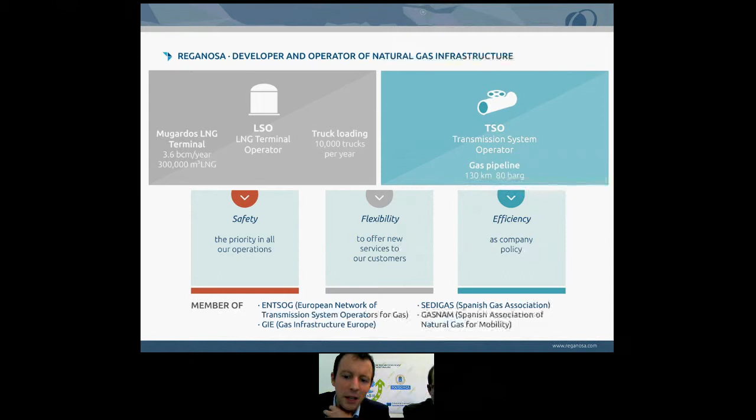Okay, very short overview on our company. Reganosa has a specificity to be both an LSO, an LNG terminal system operator, and also a TSO, a transmission system operator.

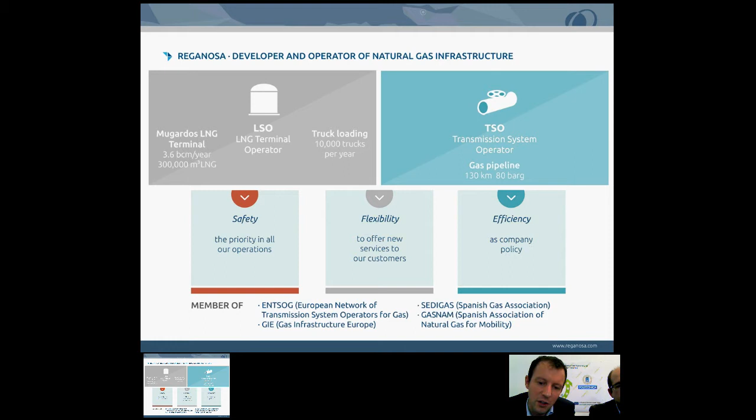The need for LNG is basically coming from the growing distance between the supply point, the production point, and where the demand is located. This distance is growing because of three simultaneous factors.

The first one is the decline in production in Europe, especially in the North Sea. North Sea gas resources were shared by UK, Netherlands and Norway, and the level of these resources is declining every year.

The second impact is the increase in demand in Asia, except maybe Japan, because Japan, after a spike in LNG consumption, is now coming back to normal. This peak of demand was due to the Fukushima disaster, and Japan is restarting nuclear plants one after the other, so consumption is mainly driven by China and South Korea in this area.

As a third point, new discoveries coming from shale gas, especially in the US, and also in Australia. Middle East is not a newcomer in the market, because especially Qatar, when we think about Middle East, we are talking about Qatar obviously. Qatar has been on track for about 10 years now.

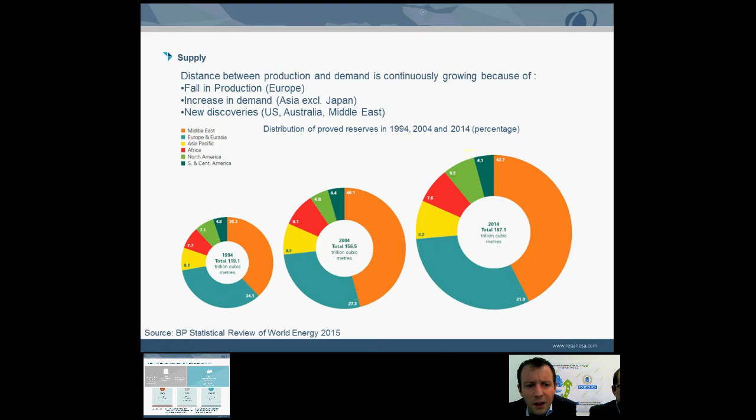So the supply chain can be presented that way: first the extraction, the production, the liquefaction facility. To have an idea, we consider that roughly 40% of all the gas traded worldwide is traded under the LNG form, as against pipeline.

So in the case of the supply chain for LNG, we come to the liquefaction train, after that we enter into the shipping, the transportation of the LNG. Once liquefied, we finish the journey at the receiving terminal, for example Reganosa, here illustrated. After that we proceed to the regasification and send the gas into the natural gas transmission system.

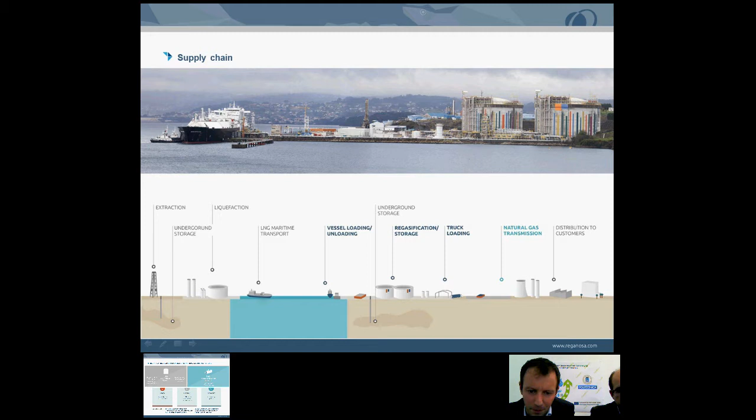Let's start with the liquefaction facilities. I will go shortly through this presentation because it is not the topic of today to know exactly how it is working, but it is also always interesting to understand the complexity of the process and why it is so expensive to liquefy the natural gas.

The idea is to use a typical Joule-Thomson depressurization that will lead to a cool down of the natural gas. First there is a propane loop which is compressed and depressed so that the temperature is decreasing. If we consider a compressed C3, it is exchanged with the natural gas so that there is a first cooling down of the feed gas, and so on with different stages of pressure.

In the middle, there is a very important loop, which is a mixed refrigerant. The process I present to you today is the most employed worldwide to ensure the cool down of the natural gas. This mixed refrigerant is a compound of light ends, especially ethane and ethylene. This ethane is cooled down by the propane, and on a cascade, this mixed refrigerant is used to cool down the feed gas.

Once the mixed refrigerant is at a low temperature, there is a flash, so that the heavy ends with less capacity of cool down go to the mid-level of this thermal exchanger, while the light ends are routed to the top of the exchanger, so that when the feed is climbing along this final exchanger, the temperature is decreasing.

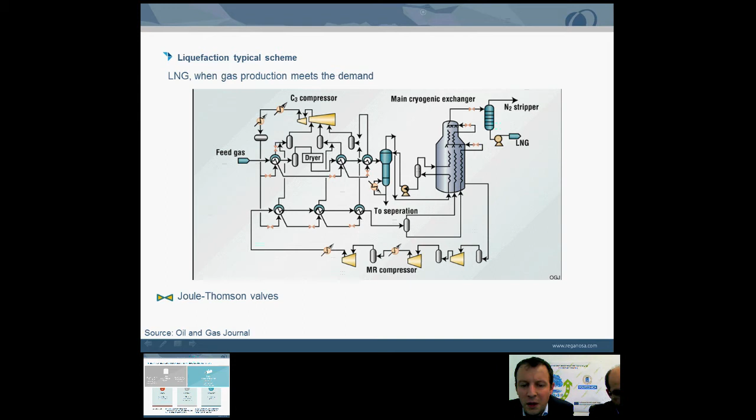A rapid overview about the distribution of the liquefaction facility around the world. As you can see, complementing the reserves I showed you before, liquefaction facilities are spread worldwide, which is quite different from crude oil, so that there is no cartel of producers of LNG like the OPEC, as an example.

In terms of market, it has a huge impact because there is no clear control of the quantity and of the prices. It is a much more liberalized market than the crude oil market on this aspect.

Basically there are few facilities in South America, but these facilities are mainly dedicated to the European market. And the coming ones will be located in the Mexico Gulf. I will tell you a little bit about these facilities, which is one of the very new trends.

The figures you see in brackets refer to the order of startups. You can see that the oldest one is Kenai, Alaska, a plant initially historically dedicated to the Asian market, obviously due to the distance. Now, the big producers are located in Qatar, mainly here. There is a huge reserve of gas.

In North Africa, the situation is a little bit different. Because of the huge domestic consumption, there is less gas available for the export market, so that, for example, the two terminals in Egypt are now shut down. Libya, obviously for geopolitical reasons, is not producing anymore.

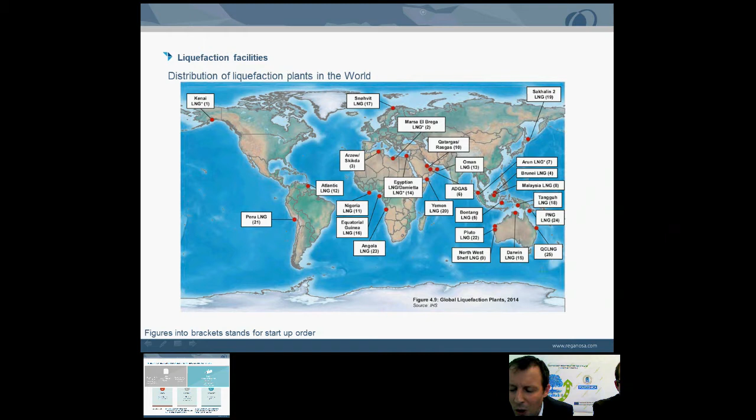A short view on the different qualities, because as I just showed you, there are different technologies. I presented the mixed refrigerant before, but there is a large range of technologies. There is also a large range of different fields, so that the final quality of the LNG is not the same. Basically, the considerations here are the same as for crude oil - there is a large range of crude oil qualities, it's the same.

There is a large range of LNG qualities, starting from the lighter, basically Indonesia, but Trinidad also, which is more active right now, is well known to be very light LNG, going to extreme values as Libya, which is not producing anymore, but we can also mention the Oman LNG.

What is interesting talking about technology is that if you look at Algeria, all the gas is coming from the same gas system, basically from the same field, but there are 3 different facilities that ensure the liquefaction of the Algerian gas. The same field with different technology, because the years of startup are very different, and it's quite interesting to see a large range of quality coming from the same field.

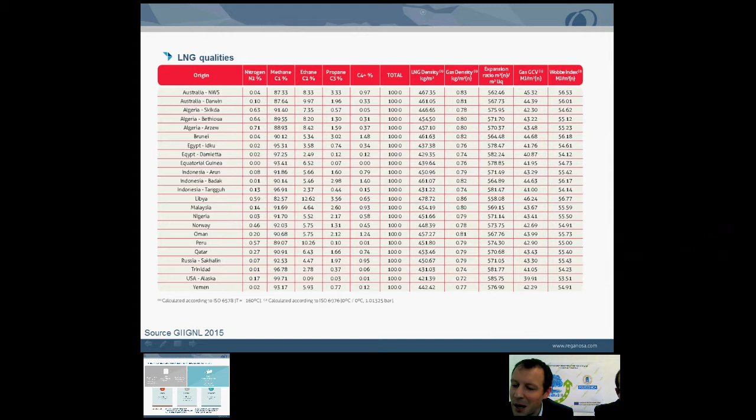Now, if you have a look on the quantity, what is very relevant to notice is that Australia is a newcomer.

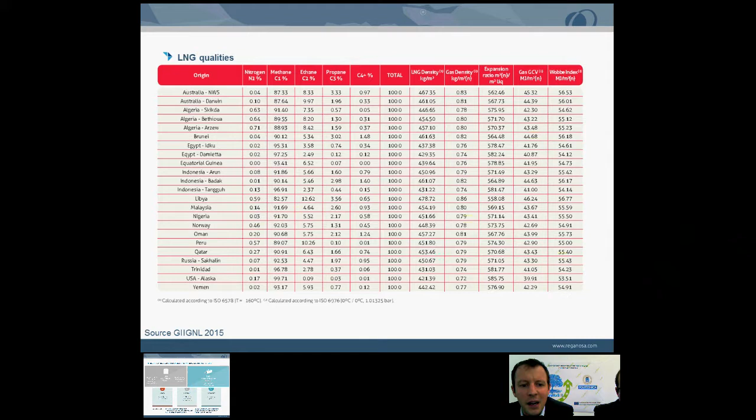You can see here the capacity in 2014 and here the capacity in 2020. So the newcomers are Australia and US, starting almost from zero and growing to very important values, including close to Qatar capacity. So US and Australia are game changers. They are reverting the gas market and changing the way gas is priced worldwide.

What is also interesting to notice is that these facilities are almost used at full rate. You can say that in the US it's not the case, but we are referring to the Alaska plant, and this plant works in stop-and-go mode. It's not the new coming plant. This one started up in the middle of the year, so the rate of use has obviously changed.

In Indonesia, the gas field is suffering depletion, which impacts negatively the send-out of this liquefaction train. Finally, Algeria is also facing a lack of feed gas, as well as Egypt, mentioned before, and Angola suffered problems during startup, so we expect it to come in line in 2016.

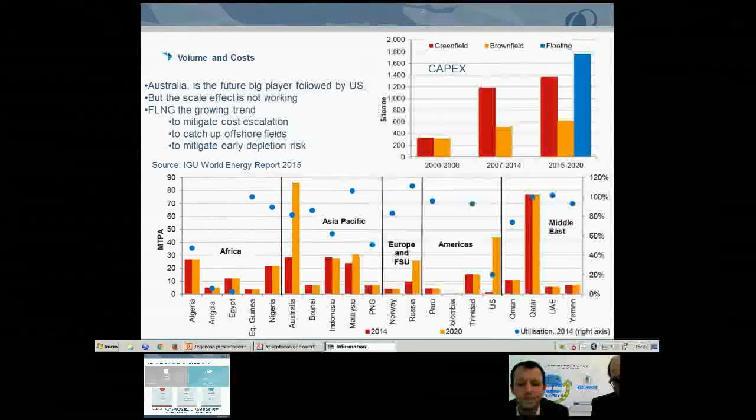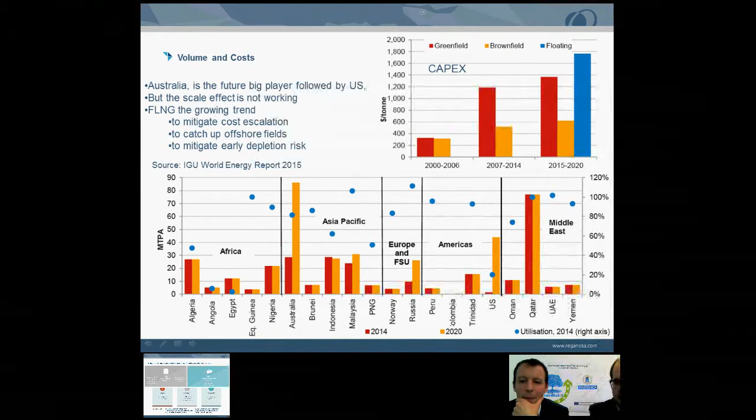Now, a few examples of floating LNG. The one I mentioned, obviously the floating LNG is not moored close to Westminster Abbey. It's just for the sake of understanding the size of these facilities that I show you this picture. But it's a very important facility.

Basically, here's the flare, which is always very impressive because the flare can be used to route a large amount of gas in case of shutdown of the facilities. On the top sides, we can see all the liquefaction stuff, and on the bottom of the vessel are located the tanks. So there are different approaches.

In the Shell approach, the shuttle will come alongside the Prelude FLNG. In the case of the Petronas project, they will normally come at the aft of the vessel. And there is also, let's say, a low-cost solution.

Golar is quite familiar with this creative solution, and you can imagine what it consists in. It consists of an existing vessel completed with 2 liquefaction blocks, so that it saves the cost of building the initial vessel, and here you can see the flare. So a different approach, but driven by the same philosophy: the flexibility that the floating LNG technology offers.

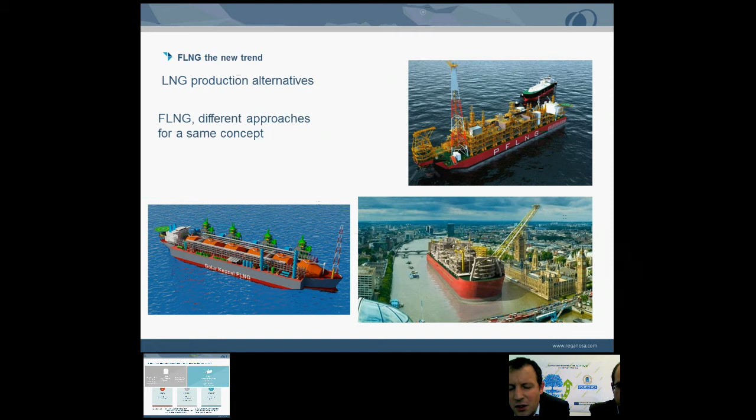Now, the LNG import terminal, we are talking about the regasification facility. You can see that these regasification facilities are spread worldwide. I will not enter into detail, but what you can see is that Japan is a very important importer of LNG, the first importer in the world. And this was even more true after the Fukushima disaster that led Japan to shut down all the nuclear power plants. The second importer is South Korea.

So it is not that, okay, here it is. You can see it, but they are huge terminals, very, very massive terminals. Newcomer: China. China is importing more and more LNG and building new terminals very quickly, either onshore terminals or floating terminals. I will explain the difference after that. And in Europe, there are about 25-26 import terminals, but they are running at a very low rate. I will show you right now the figures.

As you can see, there is plenty of spare capacity in the regasification terminals. Basically, we consider that there is twice as much regasification capacity as liquefaction capacity.

Especially when a regasification terminal is used as a peak shaving facility, which is the case in South America, in Latin America, especially in Brazil, where the LNG is used for power purposes during the dry season, when hydropower is at a very low level. And basically the same in Argentina, but with lower impact of hydropower—it's more a seasonality impact.

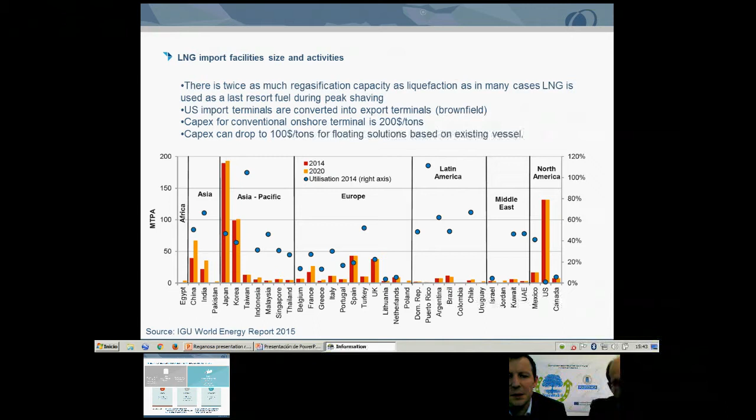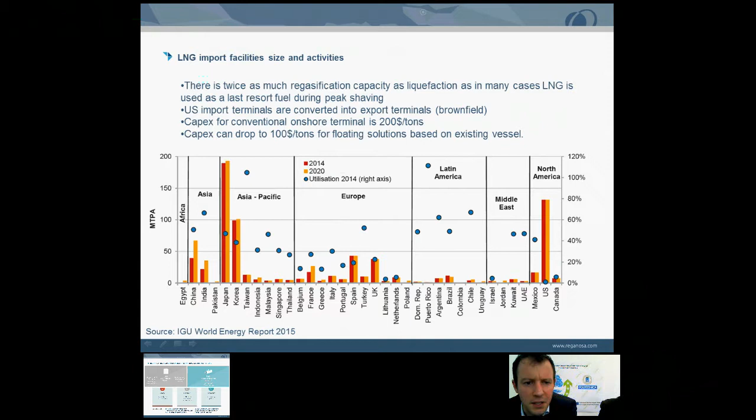So let me present the different solutions. In terms of scales, I first obviously present our terminal, 300,000 cubic meters of storage capacity. We can go to very important terminals in Japan, 2.6 million, huge terminals, with a ratio between send-out and energy stored which is very different because of the long distance to reach the Japanese market.

So while in Spain, as an example, we can expect an 8-day journey to deliver LNG, in Japan it will be double. This explains, let's say, that they intend to cover the possible problems within the supply chain by increasing the level of storage in their terminals. And to conclude this slide, an example of small-scale LNG. Jesus will go deeper on this topic, but the message here is that there is full flexibility in terms of sizing of the terminal, and you can go from 500 to 2.7 million.

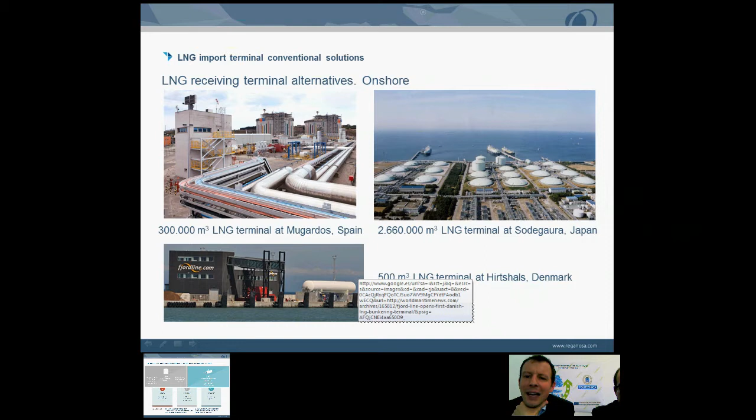Now let's have a look at the floating solution. Floating solutions are the new trend, and nowadays 50% of the new projects are delivered under the floating solution.

So if we start from the most onshore-like solution, we can talk about FSU, floating storage unit. In this case, there is a vessel in charge of storing the LNG, and an onshore platform, whatever the solution employed, in charge of regasification of the LNG, and after that the regasified LNG is sent to the grid.

Here we can see the shuttle vessel which is in charge of bringing the LNG, and we can have a lighter solution. This is a conventional LNG carrier fitted with regasification equipment on the aft.

Basically they are typically shell and tube exchangers using either seawater or a closed loop heated with boilers. The choice of a closed loop or seawater depends on regulation. In any case where it is forbidden to use seawater, they use the closed loop. In terms of OPEX this has an important impact, because the closed loop is much more expensive than the open loop with seawater.

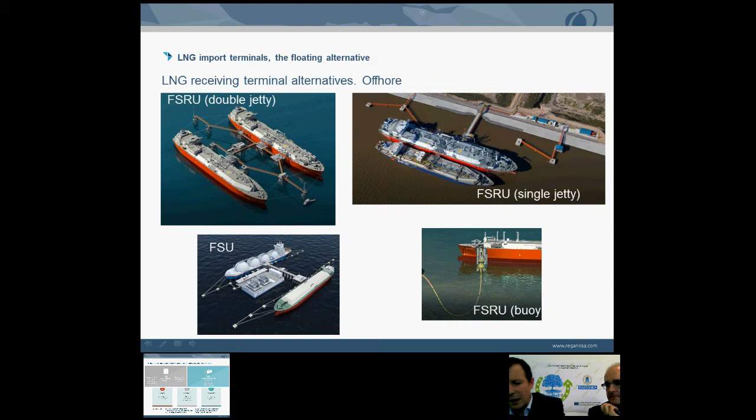Switching to shipping. The first shipment of a commercial LNG carrier was in '64, and the LNG was loaded in Algeria, Arzew. So here you have the illustration I showed you before in the quality table of LNG.

You will see the quality of this LNG and the presence of heavier components because of the less efficient cooling process, but that's a detail. The first commercial shipment was from Arzew to Canvey Island in the UK, aboard the vessel Methane Princess.

The Methane Princess is quite a small vessel. When Jesus tells you about the vessels, you will see that today there are vessels up to 260,000 cubic meters.

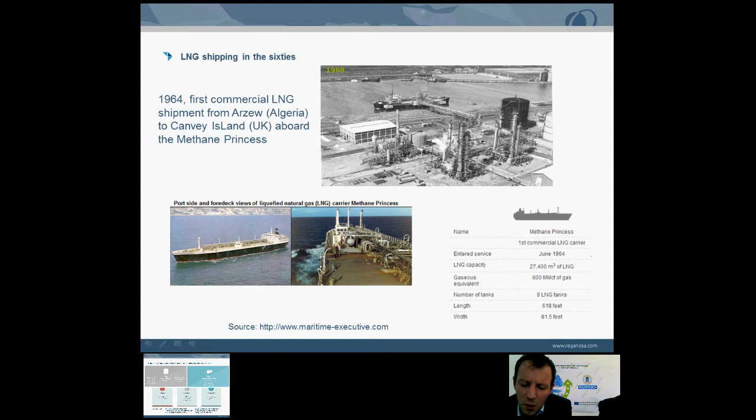Basically, if we want to define an LNG vessel, there are three main definitions to describe it: the technology of the tanks, the technology of the propulsion, and the size of the tanks.

So, talking about the technology of the tanks, today almost all new builds use GTT, a French company, GTT technology. These are membrane tanks, with maximum pressure lower than 700 millibar. So basically we can talk about atmospheric pressure, because the LNG is subcooled at minus 160 degrees, which allows the vessel to operate at a very low pressure. I will show you after that a short video about the insulation technology regarding this technology, because I guess it is the relevant one to talk about, as it is the most employed worldwide.

The second technology employed for conventional vessels, I'm talking about vessels in the range of 140,000 cubic meters capacity, is spherical tanks. And at the very beginning of the history of LNG shipping, we can also observe the construction of LNG vessels according to the prismatic, self-supporting technology. Let's say it can be compared to the onshore tanks that are now built in Europe in terms of technology.

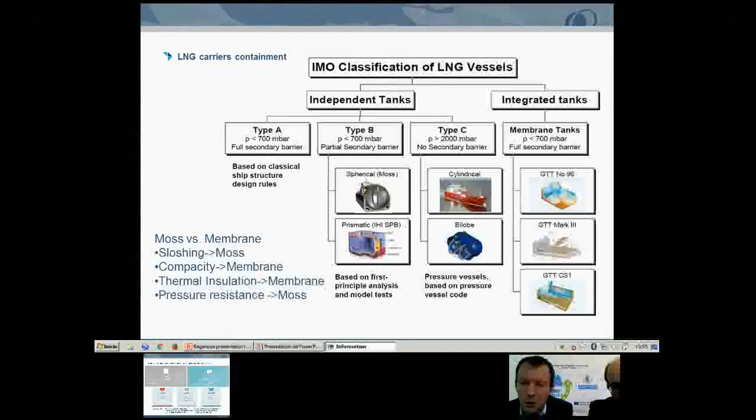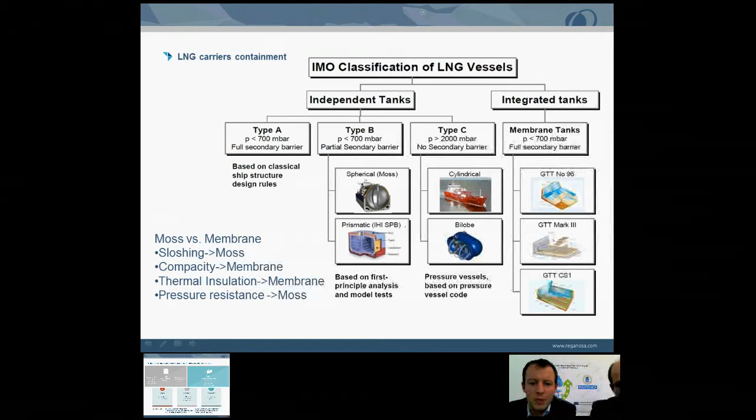So we'll now show you a short video about the GTT technology. You can see that it is a kind of, let's say, Lego in terms of building, very interesting to see.

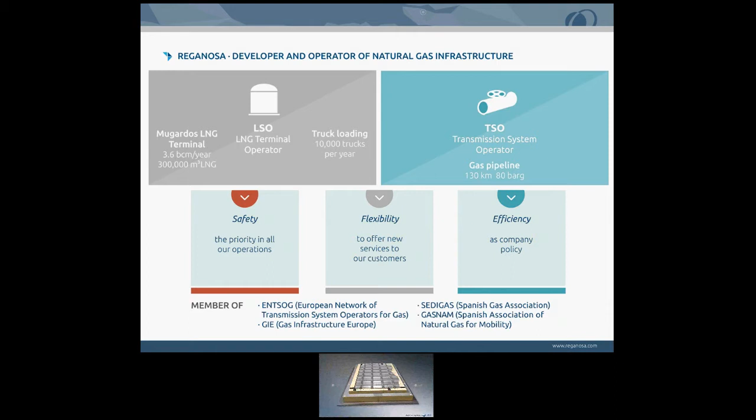We were not able to comment on the video while it was playing, but what you can see, which is quite surprising, is that one of the main components of this technology, Mark III, is wood. The tanks are made of wood. It's very interesting because the capacity of wood under cold conditions is excellent, so wood is a preferred material just after the primary barrier.

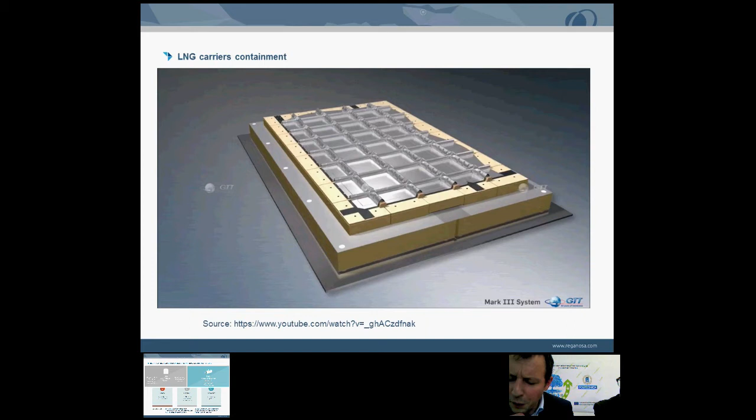Now to finish with the vessel, I will tell you about the propulsion technology. The first technology employed was basically the steam turbine system. It has an important advantage: exactly like a boiler in a refinery, these are dual fuel boilers able to burn either heavy fuel or boil-off gas, because the natural evaporation of the LNG along the journey is burned directly for the propulsion of the vessel. So LNG is a unique example of a vessel using its own cargo to ensure its propulsion. Very interesting.

The steam turbine system basically consists of burning gas or heavy fuel in a boiler to produce steam, and using that steam through a turbine to ensure the propulsion of the vessel. Now, on new builds it is not used anymore because of its poor efficiency.

The new technology comes from a diesel electric system. The idea is to use a diesel cycle motor burning gas, fuel, or diesel oil, which is used to produce electricity. The electricity is then used through electrical motors that ensure the propulsion of the vessel. In terms of construction, it's very interesting because there is power generation on one side and propulsion on the other, with the possibility to switch the generators or motors independently, making it a very efficient system.

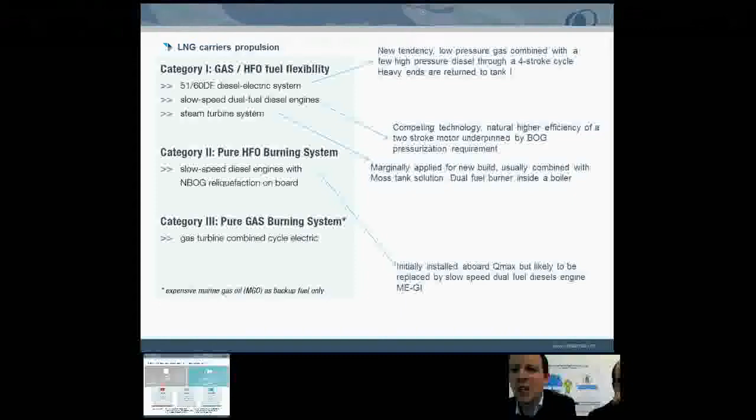One of the inconveniences of this system is that it's very strict in terms of fuel quality regarding gas. The heavy ends are returned to the tank, so after a long period of inactivity, it can negatively impact the quality of the LNG cargo. So it's important to notice.

Another technology was built aboard the Qatar vessel. It was also a diesel engine, but burning heavy fuel oil. After 5 years of operation, the Qatar fleet manager decided to convert the Q-Max because it appeared much more interesting to burn gas than fuel oil. This decision was made when crude oil was close to $100 a barrel. I'm not sure they'll fully implement this strategy given the new crude oil prices.

Finally, there is also the slow-speed dual-fuel diesel engine technology, which uses two-stroke motors. The major problem of the two-stroke motor is the pressure requirement: it requires the gas to be highly pressurized before entering the combustion chamber, which can undermine the overall efficiency. Intrinsically it's more efficient, but the energy wasted pressurizing the boil-off gas negatively impacts efficiency. So nowadays the two technologies are competing without a clear advantage of which one is better or more efficient.

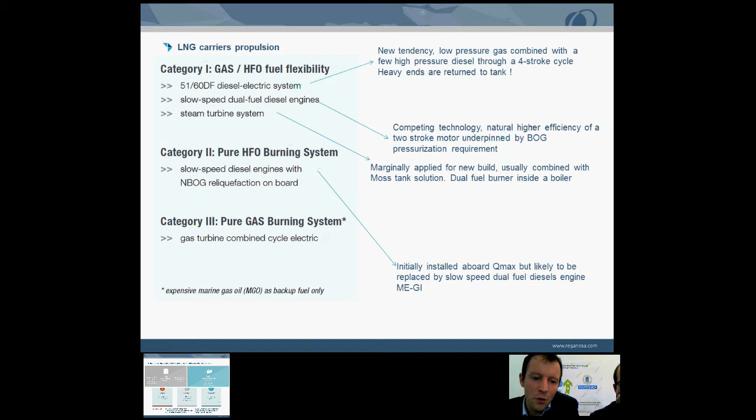Now that we know more or less about LNG, how the LNG world works, and how it's supplied and consumed by different actors, it's time to see how this comes to real life. To make this real, we have to build concrete infrastructure and structures, and these facilities are what the supply chain is made of.

I will start with the LNG terminal description and operation, and also focus on the LNG vessel navigation studies necessary to confirm that a selected place is suitable for receiving or hosting an LNG facility.

In the previous part, Laurent talked about the first LNG shipment, done in Algeria, and the terminal built in 1964. Now we are in 2015 — in 1964 we were not born, so we couldn't see that. We are people from this century, not the last, we can call it like that. Things have changed a little, but the essence is exactly the same, because the product, the LNG, is exactly the same. Different qualities, of course, but the technology hasn't moved as fast as in other fields like communications or mobile phones, which have gone from prehistoric to futuristic in 10 years.

I'll try to give you some rough numbers and costs, since Laurent was talking about cost. We know a liquefaction terminal is about 10 times more expensive than a regasification terminal, though these values won't be precise since they depend on price, market demand, construction, and the cost of steel and other materials. Just to give you an idea, a liquefaction terminal may cost around $1 billion to $2 billion.

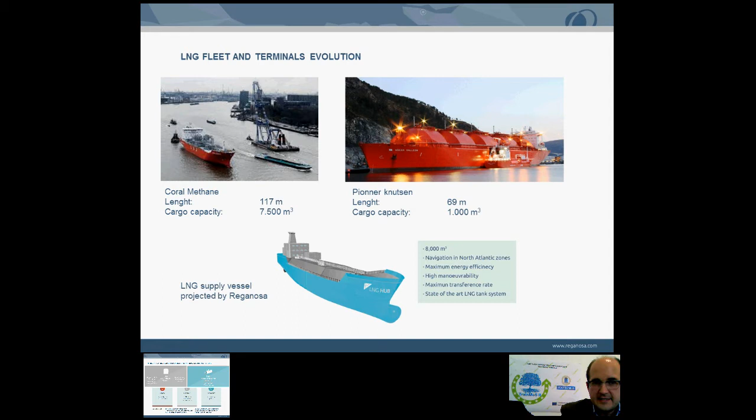For the vessel sizes and the access to our LNG terminal, the experience we can share with you is that we followed a step-by-step process, making a lot of effort and analysis with the best institutes for simulation of LNG and vessel navigation.

We can see that over time the capacity is increasing, and now, very slowly, the small capacity is also increasing. The construction of small vessels, the ones we saw before, is increasing.

After making different steps and a lot of hours of studies and simulations, sending all the pilots working in the ria of Ferrol to these simulation centers, we made all the safety procedures that allow our terminal to receive from the smallest to the biggest LNG vessel.

The biggest, as I mentioned, is the Q-Max, a Qatar ship that can transport up to 266,000 cubic meters of LNG. The price of the cargo depends on the price of the LNG transported, which can be, with no big error, between $20 and $30 million per cargo. We are talking about a lot of money sailing around the world, so it's very important to increase the capacity of these LNG vessels to transport the maximum money and energy.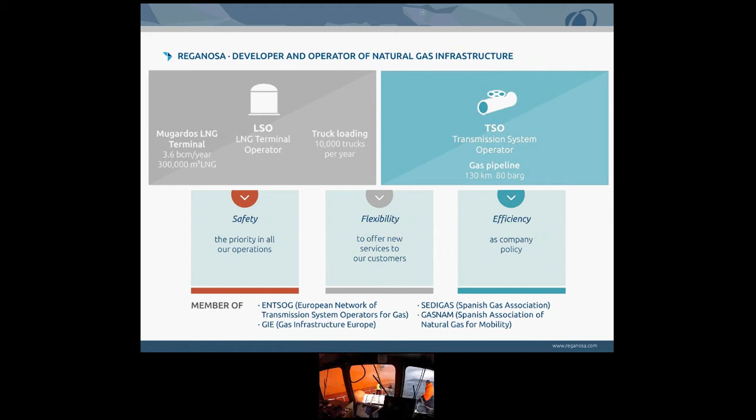Okay, we are back. What you have seen is really one hour of navigation time. It's accelerated, and there are some cuts in the navigation, but it really takes like one hour or one and a half hours.

This rebound effect at the end, where it seems that the ship is shaken like a small nut navigating in the sea, in real life you cannot see it because the vessel is so big and the speed is so low that it's not really appreciated. You cannot appreciate it because the speed these vessels use is like 10 centimeters per second, just to minimize the reaction force of the fenders to the ship.

In the next video, which is more or less the same, you'll see what the pilots see on the bridge, using this GPS advanced system that we provided them, which the ship also has. There you can see both images, the navigation on the chart and the real video, the same video we saw before, but now seen from the top.

It's really interesting how these small red things are the tugs that normally help the LNG vessel maneuver. In our case we use four tugs, two at the bow, two at the stern, always helping the ship. Also on the right side you will see the speed in different areas of the navigation, in the channel approach and also when approaching the quay here in this image.

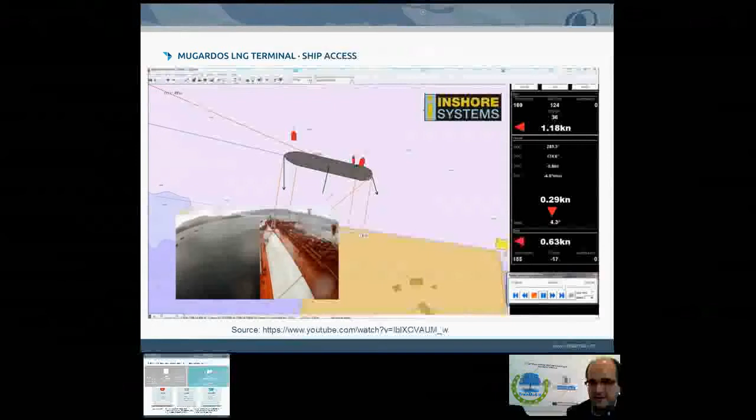So we have seen more or less the same maneuver, but now how the pilot sees it from the bridge. It's really interesting how these tugs help the ship, and it's very important to define the capacity of these tugs to help the ship when she needs it. Maybe sometimes they pull, sometimes they push. So it's the pilot here on the bridge who is always speaking with these tugs to find the best support and the best help for them to bring in the ship.

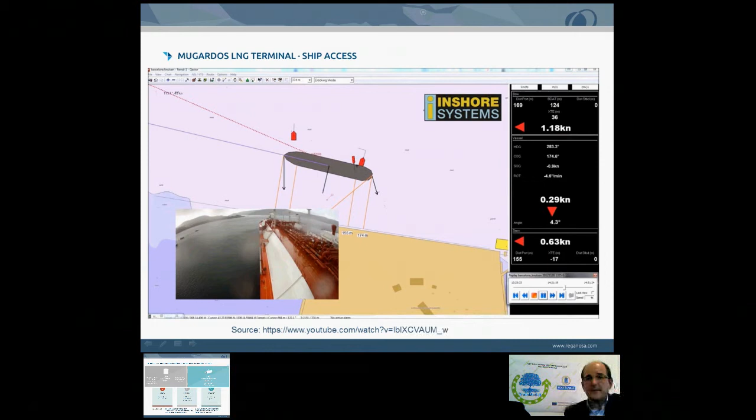Here we can see a normal or standard LNG terminal process, and maybe we can speak together just to make it more clear. What is important is to define two things. It's a pure physical process, and there are two main differences: in pressure and in temperature.

We have the side of the vessel that is at low temperature, minus 160 degrees, and low pressure - it's like ambient pressure, we can say like 150 to 160 millibar gauge relative to ambient pressure. And also we have the LNG tanks, that are more or less the same pressure and the same temperature, a little bit higher working pressure - we can work up to 290 millibar gauge.

In LNG terminals, we speak normally with gauge reference to the pressure, because we work below ambient pressure or over ambient pressure. We can also work with vacuum.

So the process starts with the transfer of the LNG to the tanks. It's always the vessel who pumps the LNG to the tanks, and the speed or the flow, in our case, is 12,000 cubic meters per hour using 3 LNG liquid arms located in the quay area.

When the LNG tank on shore is getting filled, there is a vapor that is increasing the pressure in the LNG tank. So this boil-off gas, generated by the increase of temperature of the LNG, is sent to the vessel, because the opposite is happening there - the level of the tanks is being reduced, and there is an empty space that she needs to fill. That's why the vapor that we don't want in some way, we give to her, because she needs this boil-off gas.

After the recondenser, we are at 8 to 9 bar, as I told you before. We proceed to the second stage of pumping with the high pressure pump. Here are 2-stage pumps, and here are 11-stage pumps, so we are pumping from 10 bar up to 100 bar through these pumps.

As you can see, the flow is a little bit lower than the primary pump, basically because part of the LNG is routed through the trucks. After that, we have basically two ways of vaporizing the LNG.

The LNG is now at minus 160 degrees. There is no thermal exchange at this stage. And the pressure is 100 bars, so we are above the critical point of the LNG.

So we are making a vaporization at critical stage, either by using seawater. We are pumping much more seawater than LNG. The basic rule is 10 times, so that when the LNG vaporizes from minus 160 to 0 degrees at the outlet of the vaporizer, the seawater only cools down by 6 degrees. This is an environmental regulation, we are not allowed to cool down the seawater by more than 6 degrees.

The alternative, which is not the preferred one, because as I told you, this technology requires burning your own gas: we are able to vaporize the LNG within an exchanger submerged in a pool of water, and this water is heated by a burner where we burn gas. It's less efficient because you have to burn your own gas, but it's a backup system, especially for maintenance work on the seawater system.

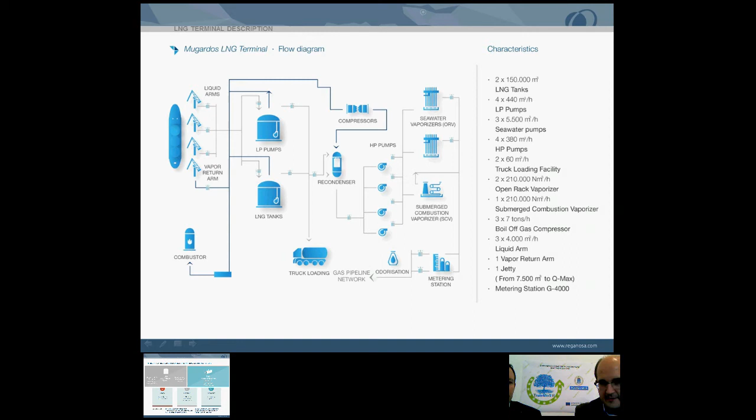Laurent talked before about the global price differences, the Asia price, the Japan price, and how global trade companies try to solve that, and how the European business is managed with long-term contracts for the supply of gas. These investments of thousands of millions of euros or dollars require long-term agreements, so normally producers sign long-term, meaning 20 to 25 year, contracts with users to buy this LNG.

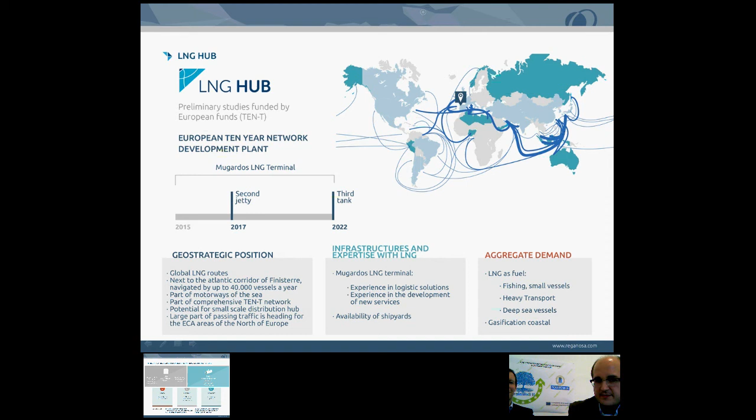And what is the most representative user? We have done several studies, and 21.3% of the order books of LNG-powered vessels — vessels that will be powered by LNG — are container vessels, medium container vessels.

This is the reason trucks are feasible when the amount of energy is small and it's just a spot supply. If you want a regular base supply, then you have to move to small scale vessels. According to some DNV studies, it's expected that by 2030, 31.9% of the container vessels of the world will move with LNG. It's a good approach, and it's expected that all actors of the LNG supply chain want to take advantage.

Now we go into the main equipment, not in too much detail since we're running out of time. The main equipment used to unload or reload the LNG are the unloading arms. When the scale of the ships is small, instead of using these huge unloading arms, which weigh like 90 tons, are about 40 meters high, and cost around $500,000 each, we can move to hoses, to flexible hoses. What's important for an LNG unloading arm is its compatibility.

We can see here in this gray area, the compatibility area, the movements of the LNG arm against the vessel. Here we can see the box - these two boxes are the manifolds of the vessels. When the LNG vessel is very small, this arm will not reach the manifold of the vessel, because these arms are designed not only in our terminal but in all terminals as bigger scale arms.

Here we can see two limit lines. This is a pre-alarm line, meaning that if the ship moves out of keys for any reason - wind, tide, or whatever - this alarm will generate a close order of the valves that the arm has. There are also two more alarms, ESD1 and ESD2, emergency shutdown. ESD1 closes the valves and pumps of the ship, and ESD2 means another valve closes and there's a physical disconnection of the arm, so the ship can move out of the terminal without any leakage.

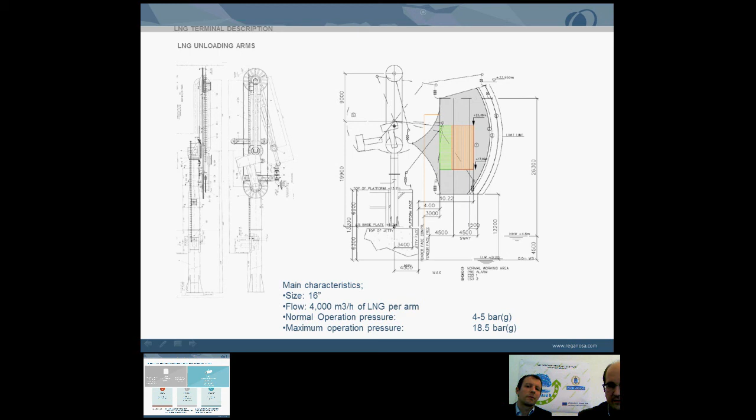It's very interesting, this video, because we'll see how this part of the facility simulates the movements of the ship, and this part is the arm. You'll see that this arm is white, not painted - it's ice, because for this test the arm is full of liquid nitrogen. It's really cold too, because they have to simulate first the movements with cold conditions plus the liquid weight inside the pipes, since these are rigid pipes connected with swivel joints that allow this movement.

So here in this photo we made a screenshot. You'll see this small cloud, which is the amount of liquid nitrogen trapped between these two ball valves, which we'll see in the video closing during an emergency disconnection. When these two valves close, a small space remains between the two balls, and when they open and disconnect, the volume trapped between these two balls is released. So we will see the video now.

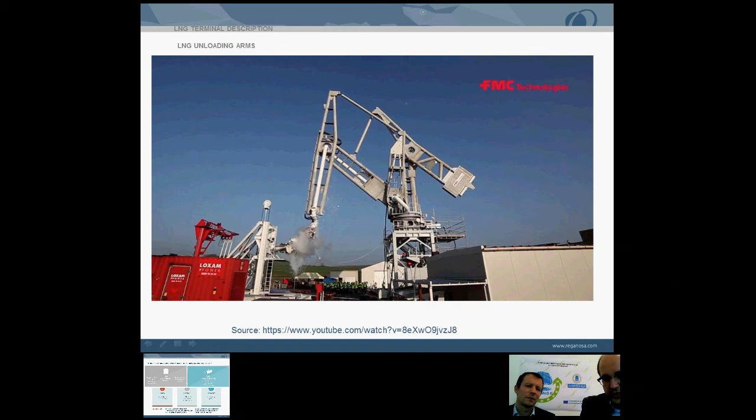This video is available on YouTube, so you can download it. Here is the reference. There is a special video of a real unloading operation with a Nigerian ship. We know it's Nigerian because of the color of the tanks, where we can see a full unloading operation with this 12,000 or 14,000 or 10,000 flow, we don't know exactly, for this ship, when by any reason, by an error of the operator or an error of the system, it led to a disconnection of the arms.

So you will see how the arm is frozen. This is ice. You will see small drops of ice that fall from the ship, and also this cloud is the LNG that is trapped between these two valves, and when it disconnects, it's liberated. You will see there are 3 liquid arms and 1 vapor arm. So logically, the vapor arm has less weight, and it is the first one disconnecting. Okay, so we will see this video.

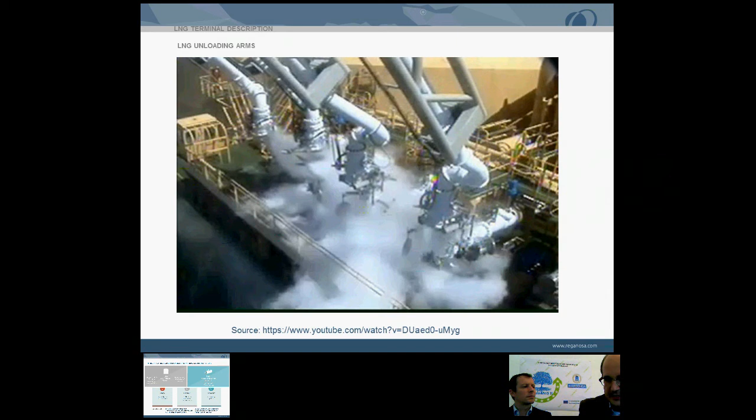Now we go to the LNG tank. The LNG tank is one of the most important pieces of the facility, and as Laurent mentioned before, the US facilities are a big investment that you can save if you want to transfer a receiving terminal to an export terminal. This LNG tank is a typical one. The liquid is stored in liquid phase at -160 degrees, and this temperature is maintained cold by insulation, made basically with perlite and foam glass in the bottom.

Here we can see that this is a full containment tank. What does this mean? In case there is a leakage or rupture in the inner vessel, the liquid will fall down into this perlite area, but will be contained by the concrete structure. It's full containment because the structure is on the bottom, in the wall, and also in the roof, the dome. This cover is what is called a suspended deck, like a cover of the LNG to minimize ingress, and the space between the inner tank and the outer tank is normally between 800 and 1 meter thickness, and this is full of perlite that is compacted.

Here we can see, and in the next slide we will see better, there are some coils. And why these coils? This LNG is at -160 degrees. All the ambient is at normal temperature, like 40 degrees, 20 degrees, whatever temperature, and the ground normally is at the temperature of the air, like 10 degrees, 16 degrees. If we leave the LNG here, the insulation is not perfect, so at the end everything will be cooled down, absolutely everything. And if we decrease the temperature of the ground below 0 degrees, all the humidity, the water that is in the ground, will create ice.

So you know that if you put a bottle of water in your fridge, the volume will increase. The same will happen in the ground. The bottle will break, and at the end the ground will break. The stone can break. It's a traditional way to break stones in ancient areas, to use water and the ice to break the stones.

These coils are used to heat and maintain the foundation of the tanks at 4 degrees normally. It's a cycle, heating on, heating off, an on-off cycle to maintain this temperature always at the same value. Electrical heating, yes, these are electrical heaters.

There is another option for some terminals, for example in Greece and also in Zeebrugge in Belgium, where instead of having this foundation directly supported in the ground, we use piles to support the LNG tank, and there is air directly between the foundation and the ground. So this air is making this.

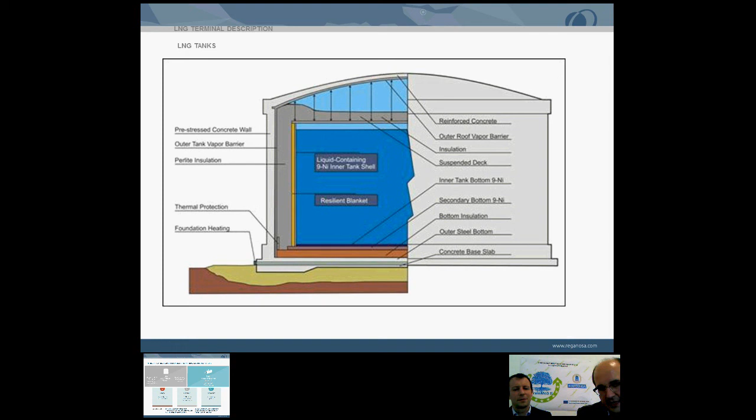Here we can see quite a nice description of the different layers of the tank. It's like a big thermos of coffee, and you have the LNG at minus 160 degrees, minus 158, depending on the LNG, and 1.5 meters away you are at ambient temperature. This is a scale more or less of a person.

To get complete insulation, there are some layers of insulation. Wood was used before, now it's moved to other products like foam glass or cellular glass or different products, but it's like a Lego of different layers of insulation and different products to avoid the heat entering the tank and the cold going out of it.

What is important in terms of construction is this inner tank. The inner tank has to be what is called the primary tank wall, and also the bottom needs to resist the temperature. If you put carbon steel, normal carbon steel for any structure, in contact with something below minus 30 degrees, by the proper structure of the carbon, it will be fragile, it will break. So if we are working with minus 160 degrees, the problem is higher.

To get out of this problem, basically through experience and some technology improvements, it was discovered some time ago in the 60s, 70s, that adding nickel to this carbon steel improves its resilience. By adding 9% nickel to these carbon steel plates, the carbon steel can resist this low temperature. The problem is that nickel is really expensive.

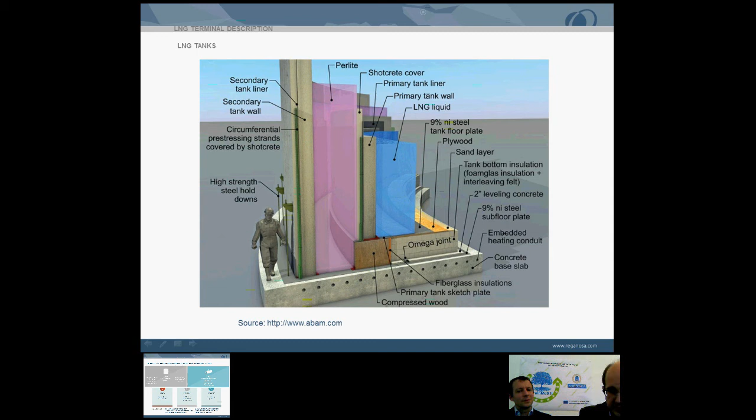These tanks are made of, this exterior part is concrete. It's like a 40-meter high concrete wall, 850 millimeters wide. This dome structure is made of carbon steel because it is not in contact with cold temperature or LNG, since there is insulation between this part and the LNG. It's like a 72-meter diameter, and the weight is like 900 tons.

So how are these 900 tons lifted 40 meters in 2 hours? It's very simple. We could use a crane, but the problem is there is no crane that can lift this roof. So a simpler solution was found: use air, just a question of pressure and force. In the end you have a very big surface, so with a small pressure over a big area you can generate a big force.

In the other way, we will see in the video 2 or 3 blowers colored in blue that put air into a small hole. By the relation of the surface areas where the air is put into the tank and where the air has to go out, there is no option to go out because it's the dome. So the air ends up filling the tank and lifting the dome. This is the solution that is mostly used everywhere in the world for this construction activity, which is really impressive — the most impressive construction operation in these terminals.

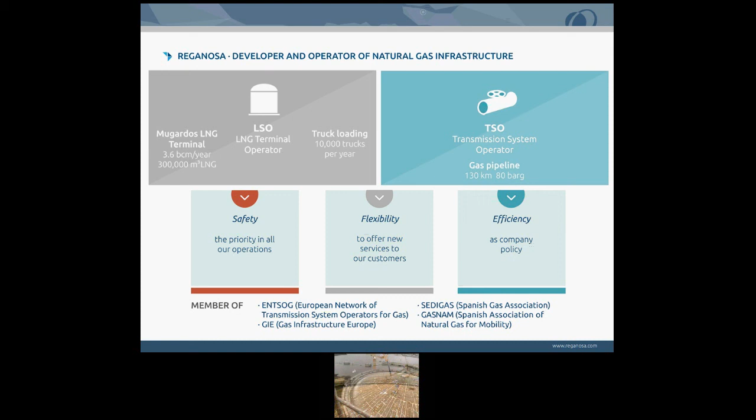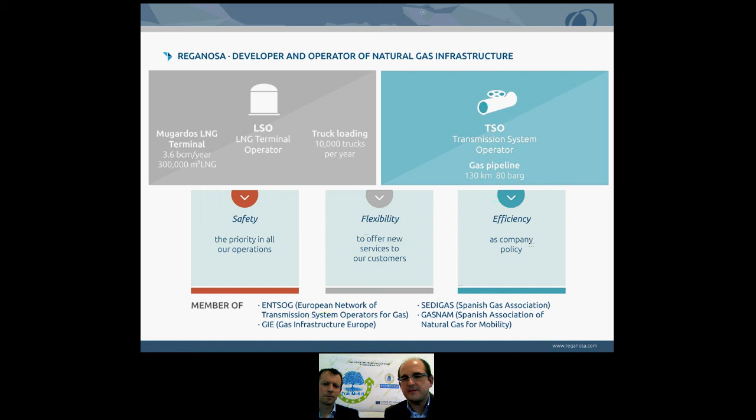So we are back again. It's really impressive how these tanks, 900 tons or 700 tons depending on the tank, are lifted only with air. It's really an engineering challenge, but based on pure physics, the most ancient physics in the world. So at the end, when the technology works, you should not move it and you should not change it.

The final way to transport LNG, and the way that we normally use, is these truck loading stations. In our terminal we have 2; in other terminals they have 3, 1, or 5, depending on the demand. And this is a typical LNG truck.

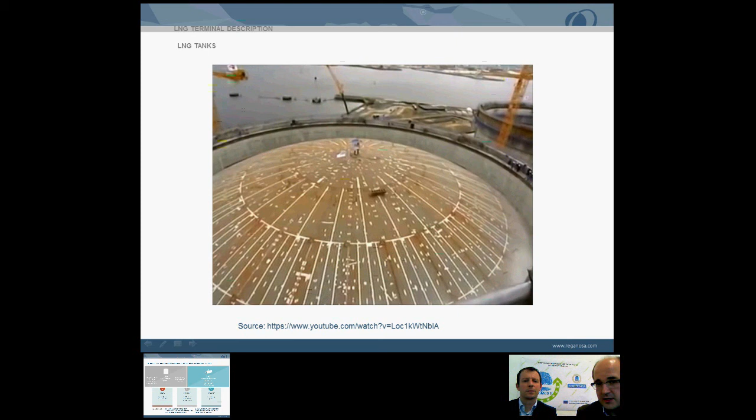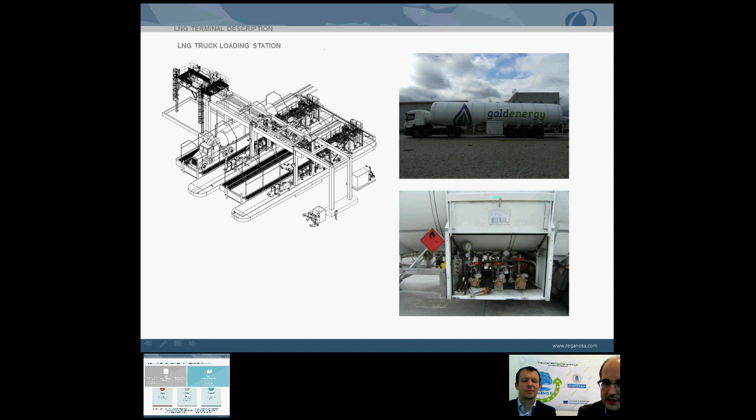This is a typical manifold located in this area, where the connections for the LNG hoses are located. Here we can see the truck loading station with 2 trucks, and what is really important when transferring LNG or any flammable product is the earthing cable. No transfer of LNG to a truck can be started if there is no connection between the terminal and the truck, to avoid a difference in voltage, in potential.

These are the 2 arms that we use to load the LNG truck, similar to the LNG vessel but on a small scale. Here is the LNG liquid arm, a 4-inch arm that can transfer up to 100 cubic meters per hour. We limit it to 60 to 75 cubic meters per hour for transferring LNG, compared with the 4,000 cubic meters per hour of the LNG vessel.

This one is the 2-inch vapor return arm that receives all the boil-off gas generated during the unloading operation, and by the displacement of LNG when we fill the LNG truck. It's similar to the LNG unloading arm of the vessel, but compared with these 4-inch and 2-inch arms for the truck, for the LNG vessel it is 16 inches.

The operation is normally governed and supervised by the truck driver, the truck responsible, and our operator, who normally have to use special clothes to avoid any spillage or damage generated by drops.

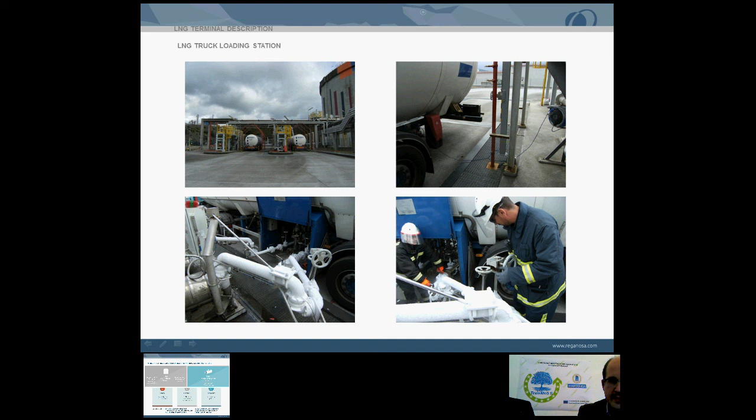In Spain and in other markets, all transportation of gas by road is governed by the ADR, the European rule to transport flammable or dangerous goods.

Around this ADR there is the purely technical and commercial trading side, the ATR, which in Spain is the access to the system by third parties — where the trading companies, end users, and transportation or loading companies share the amount of energy that we have to load, consume or transfer. There is also a commercial and pure trading part, outside the technical logistics, that normally links the energy trading company who sells the gas with the client who needs the gas and the LNG. Between these two is the transportation company, hired by one or the other depending on the contract, to transport the LNG that we load to these people.

So you can see it's like a wheel that needs to be very, very well greased to have all the energy where the energy is needed.